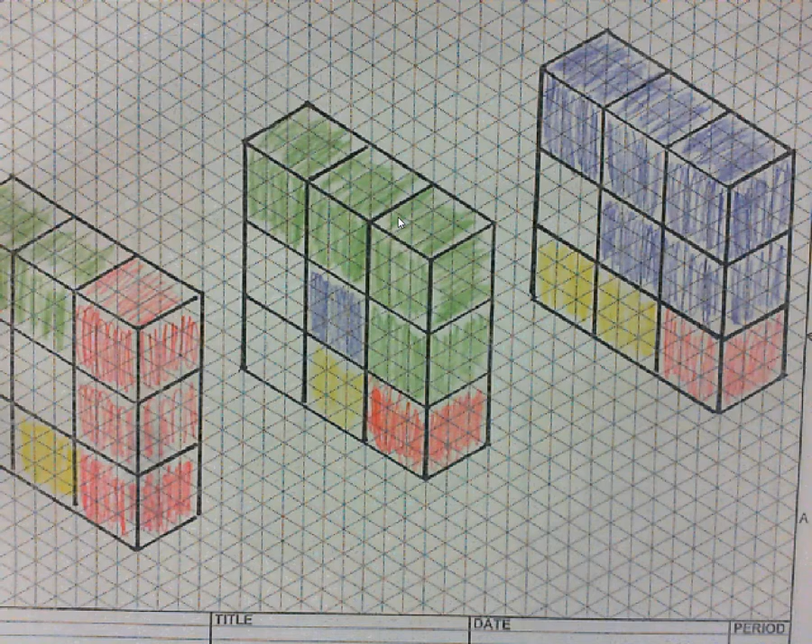The next part in the puzzle cube is to hand draw each of the individual parts separately in an isometric drawing. You should have just completed drawing 3 different puzzle cubes assembled, in a sliced isometric drawing, sliced so we can see the inside. But it makes it difficult to get a feel for what each piece looks like. Now we're going to draw each piece individually, and after that we'll go into Inventor and draw them there.

We're going to begin with the red piece. The red piece is just 3 blocks stacked on top of each other, and then it has just 2 blocks that come off of that 3-block stack.

To draw that, I'm just going to have a starting point. Each edge for each of the little cubes is 3 boxes, because each box is 1/4 of an inch and each cube is 3/4 of an inch. So each edge in my slice drawing is 3 boxes. If I have 3 blocks, and 3 boxes per block, that's 9 boxes straight up and down. I'll count down 1, 2, 3, 4, 5, 6, 7, 8, 9, and draw that.

I'm drawing very darkly because it's difficult to see on the screen, but in general you don't want to draw very darkly. I'll finish off the top.

Again, there are 2 more blocks. In this drawing they're separated because we sliced the cube so we could see what was in the back and on the left-hand side. But we're going to draw this as 6 more boxes: 1, 2, 3, 4, 5, 6. That is 1 block deep. Now I'm just going to come down and connect these, and that is my L shape.

Remember, with isometric drawings we usually shade them to make it easier for the viewer to get a feel for the 3-dimensional aspect of the drawing. So we're going to shade 2 sides: one gets a heavy shade, one gets a light shade, and the third side gets no shading. That's a pretty simple piece, that L shape.

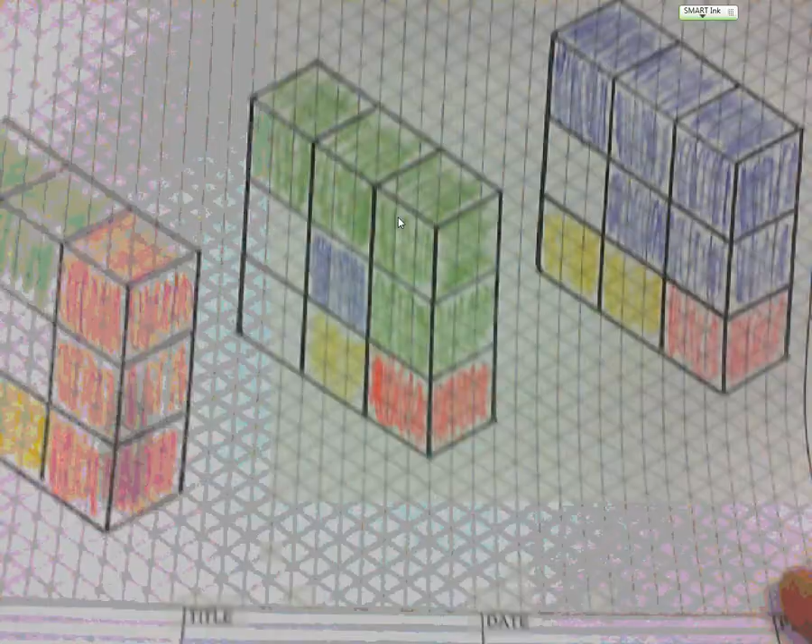The next one we'll do is the blue piece. The blue piece is a little more complicated, but when you see how we do it, it's not very difficult really.

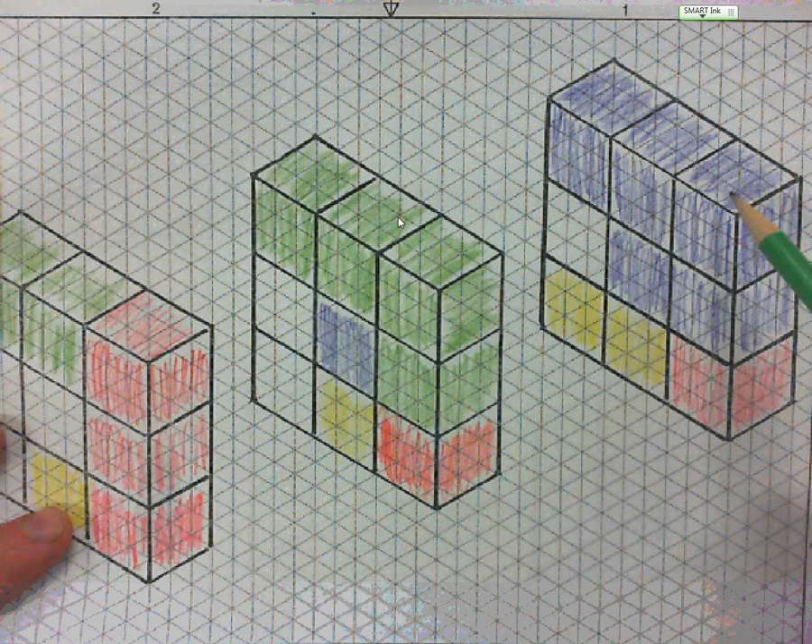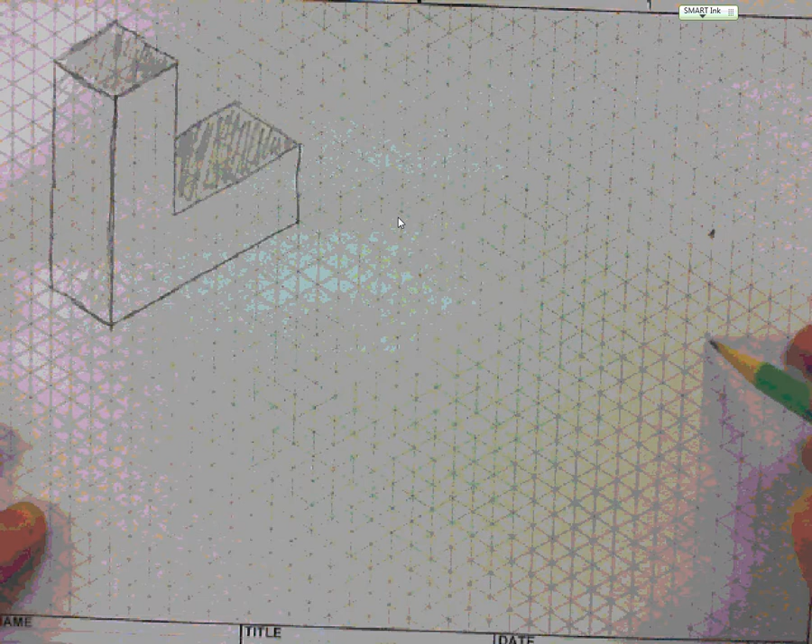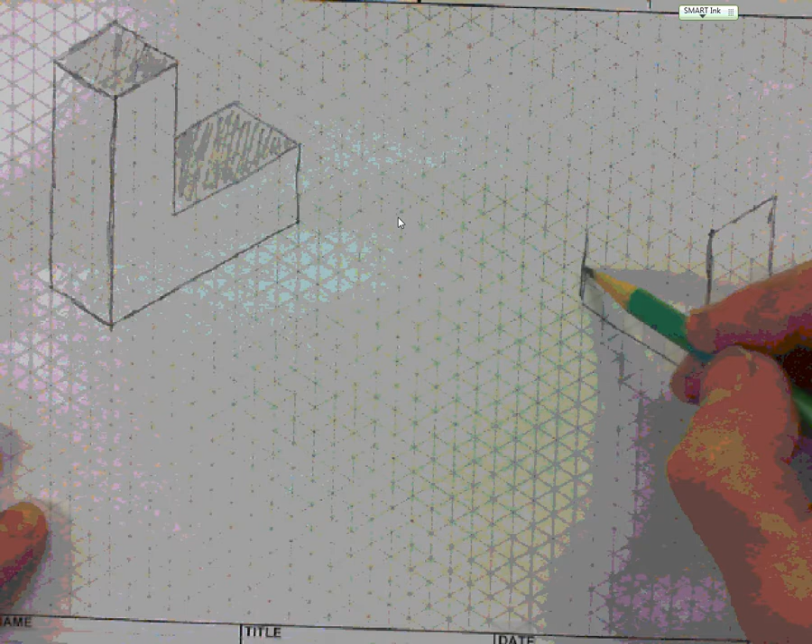We'll begin with this front right edge, and that is 2 blocks. It's actually kind of a rectangle with a little corner cut out. I'm going to come over to the upper right-hand side of my paper and count down 1, 2, 3, 4, 5, 6, because that is 2 blocks. And it goes 2 blocks back: 3, 4, 5, 6. Now I'm only going to come up 1 block. So I've done this little drawing right here. I'm going to come up and do a little zigzag, and then finish the top part on that.

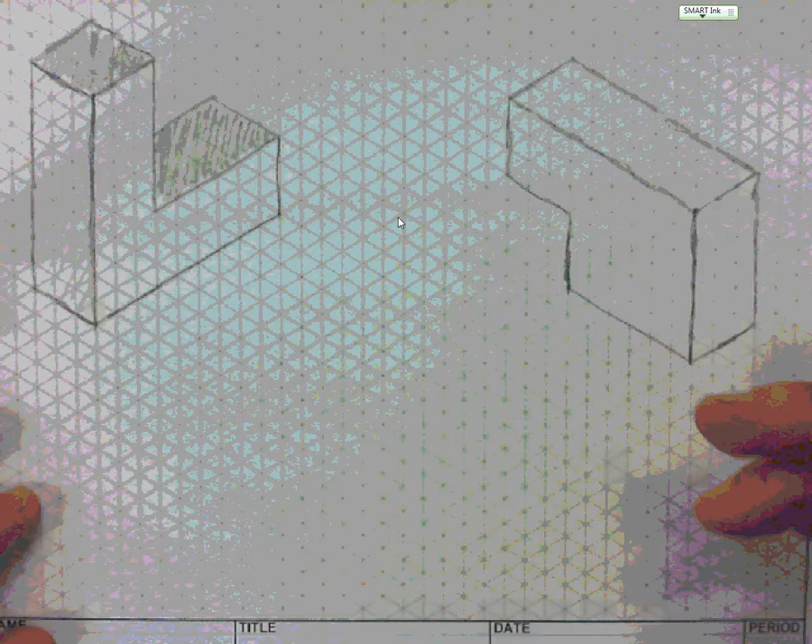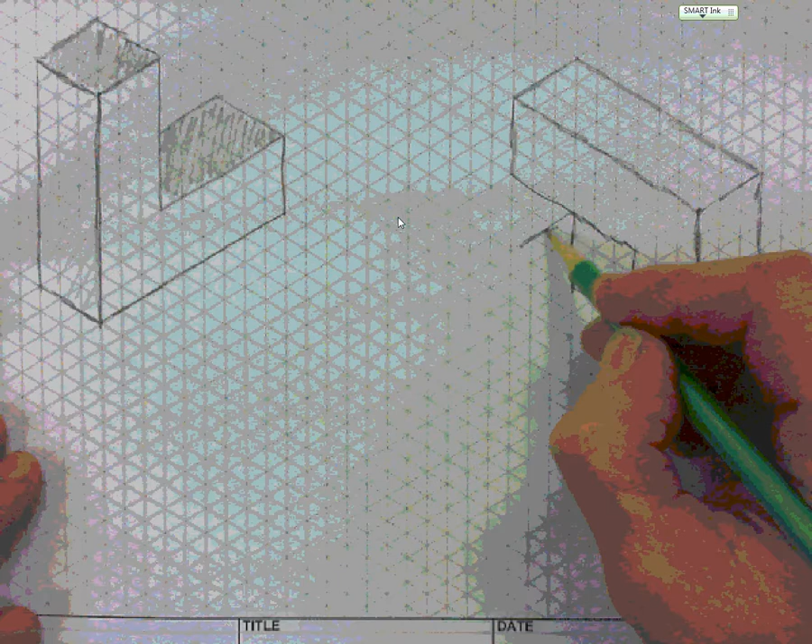That is my block, except there is a little part that juts out from the middle, and that's actually the center piece on the puzzle. So I have to draw this. Now I've drawn that centerpiece. A couple of the lines I drew previously, hopefully you are drawing lightly, have to be erased.

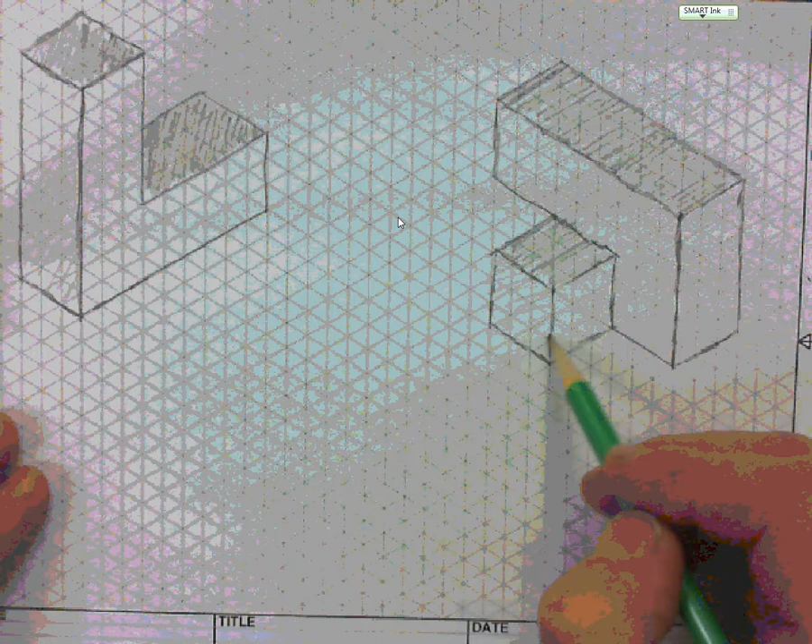And there's my blue piece. Again, we're going to shade. I'm going to shade my top surfaces with a heavy shading, and what is my front surface I'm going to shade with a very light hatch. Hatching is just lines, parallel lines. And that is my blue piece.

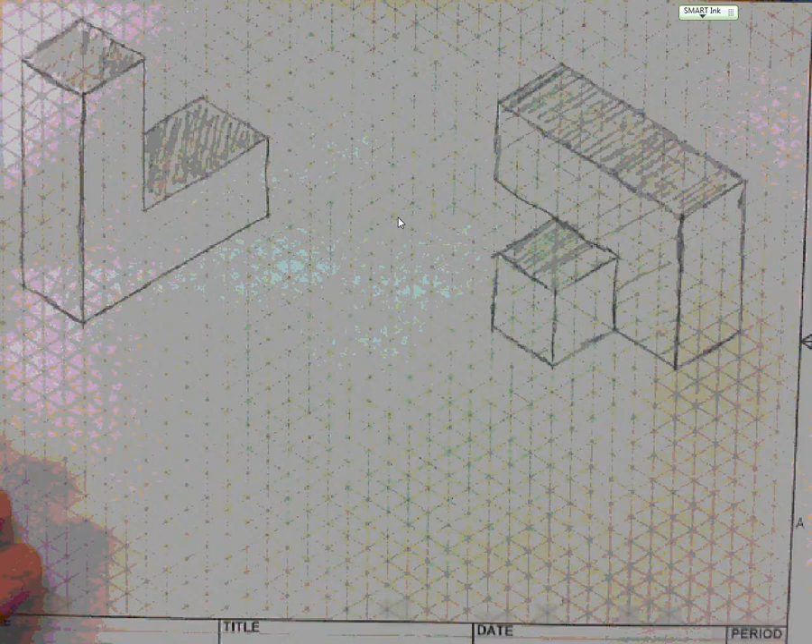So what I'd like you to do is draw your next three pieces. If you are drawing my puzzle, make sure you get permission from me first. These are two of the pieces you can begin with. If you are drawing your own puzzle, you have to draw 5 pieces. You should be able to get 5 pieces on the front and back of one sheet of isometric graph paper.